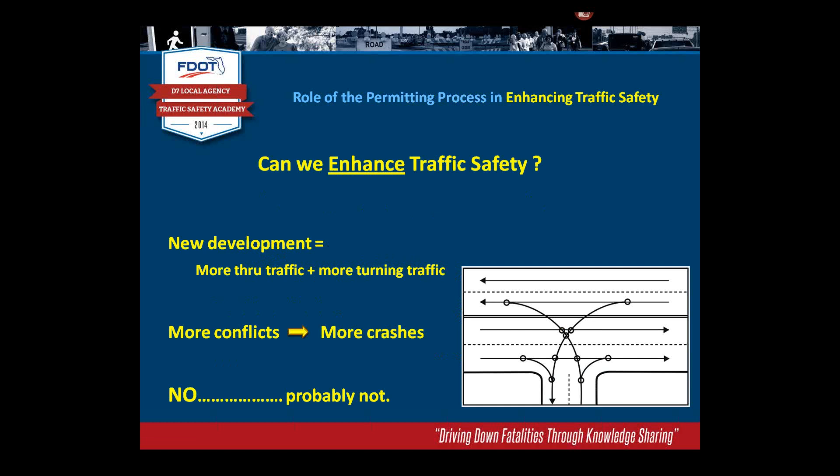That'll mean there'll be more through traffic and more turning traffic getting in and out of the development. And as we probably know, the more traffic we have, the more conflicts we're going to have. The more conflicts, some folks unfortunately are going to make mistakes, and those mistakes could likely turn into crashes. So it's going to be difficult to improve traffic safety during the permitting process, so we probably can't do that. But certainly we should be able to mitigate the impacts of new developments on traffic safety.

And the way we do that is addressing the access management features that go into a development's access. The driveways, for instance, determining the right number of driveways, the proper location of the driveways, the proper design of the driveways, turn lanes, whether or not turn lanes are warranted. If so, how long do those turn lanes need to be?

We need to address median openings. It might be that we need to adjust a median opening, change it from a full median opening to a directional, or possibly close a median opening. We may need to close a median opening so that we can lengthen that left turn lane. Maybe it's just adjusting a median opening or relocating it a little further away or towards the development.

In Florida, whenever we affect median openings, we certainly want to make sure that the businesses and property owners are aware of the median opening change. So we contact the property owners, and actually in our district we put up a little sign at the median opening so that folks know there's going to be a change there, and they have the opportunity to call and talk to us about that change.

And then if the development's large enough, it generates enough traffic, maybe there's the possibility that a traffic signal is the proper design feature that needs to be added to the roadway.

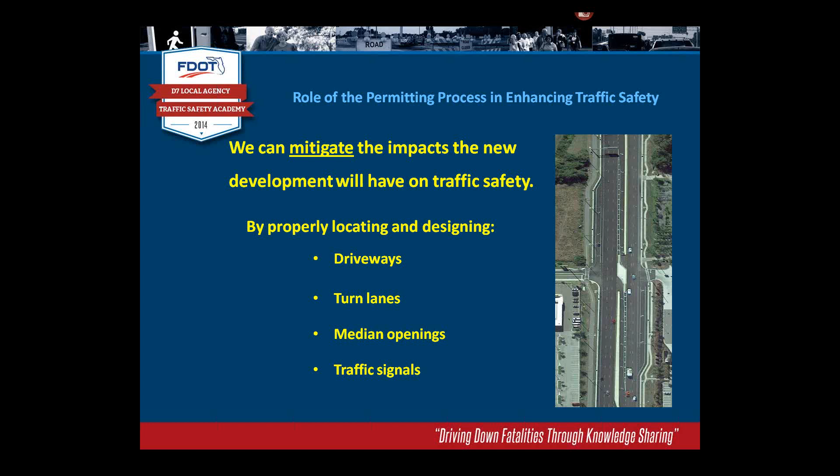So how do we go about mitigating the impacts? Well, we have to have a plan, and the plan we use typically is the traffic impact study. So one of the major topics today that we'll talk about is traffic impact studies. And then after the traffic impact studies, I just wanted to go over

How you can find some of the DOT references that we're going to be talking about today. That won't take too long, but I will go through these references so you can find them easily.

And then the last little section, I call it Stung by the Standards. I'm not sure if that's the proper title or not, but it's really just some observations I've made over the years and some thoughts I have about some of the access management features, and I'll spend a little bit of time talking about those. This last little topic is really for your consideration, thoughts that I have.

So the first topic is the traffic impact study, and if you work for the DOT, as far as I know, we only have two documents that really speak to traffic impact studies.

The first, I've already mentioned a little bit, is Rule Chapter 14-96. If you're not familiar with the Florida Administrative Code, it has a number of divisions within the code, and division number 14 are the DOT, the Department of Transportation numbers. So anytime you see an FAC 14, that's going to be a DOT rule chapter.

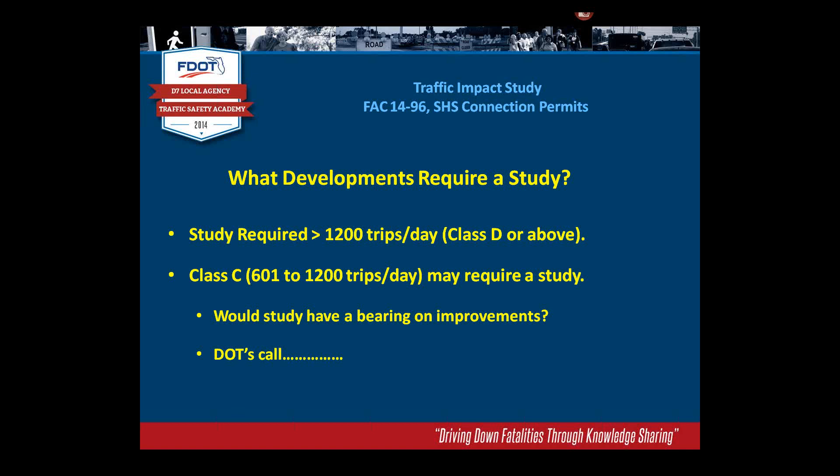The rule chapter also mentions the Class C permits, which are permits where the daily trips are between 601 and 1,200 trips a day. And you can require studies for the Class C permits, but we usually don't. We really haven't found them to be beneficial at all. But it is the DOT's call if you think there's some benefit that you can gain from those particular studies. And the rule chapter also talks about signing and sealing the studies.

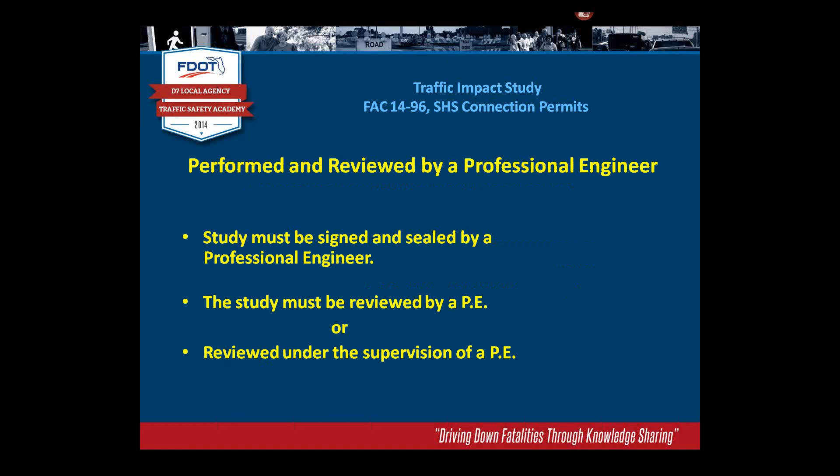The studies have to be signed and sealed by a professional engineer. After all, they are a traffic engineering study. And since they're signed and sealed by an engineer, the rule chapter also states that they're supposed to be reviewed by a PE. If they're not reviewed by a PE, then the study should be reviewed by someone under the supervision of a PE. Pretty much common knowledge, but that is specifically mentioned in Rule Chapter 14-96.

There's a little bit of information on trip generation. When the applicant submits the driveway application or connection permit application, he has to show the estimated number of trips on that application. And he has to show us which land use code from the trip generation manual he used. So that's good information to know. And again, the information on trip generation does mention the ITE Trip Generation Manual. I'll talk about that a little bit later on.

It also tells the applicant that when they're estimating the traffic, they should estimate the peak hour trips too. Usually the peak hours are going to be the morning peak hour and the afternoon peak hour. They should provide those estimates not only for the peak roadway times, usually the morning and the afternoon, but also the peak times of the development. Sometimes they're the same, sometimes they're not. So it's good to identify up front what information, in this case, the DOT will require from the developer, and we'll mention that a little bit later on too.

And then really the last bit of information that's required from the traffic impact study, according to Rule Chapter 14-96, is the applicant is required to determine the peak hour turning movements for all the critical locations or intersections. So that would be the driveways, the median openings and the adjacent streets.

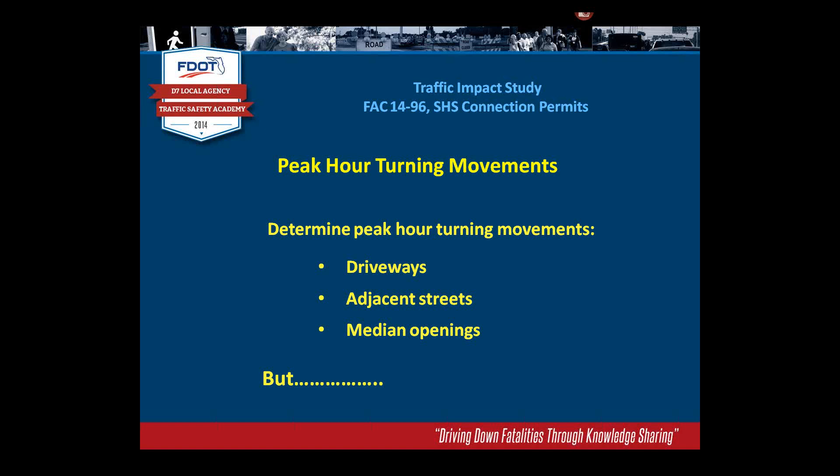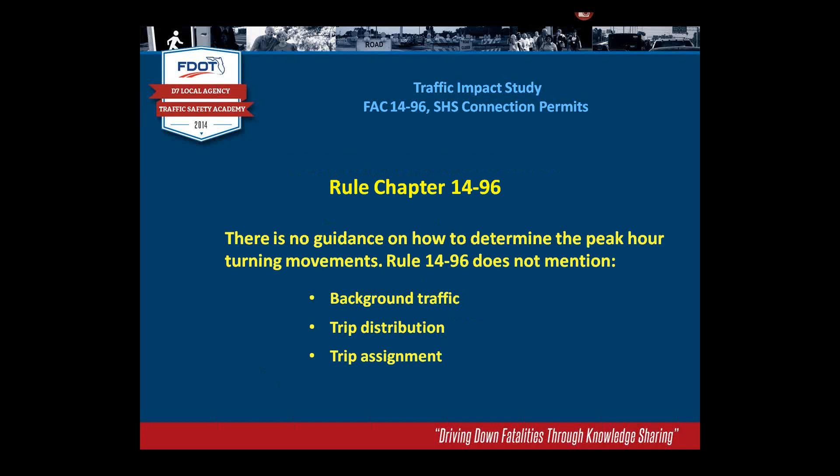But this information really isn't very detailed, and it never tells you how to even collect this peak hour turning movement information. There's really no mention of the background traffic or the existing traffic at these locations. No mention of the trip distribution or trip assignments. So in that regard, it's certainly lacking information, and it would be very difficult to complete a traffic impact study with the guidance that's in Rule Chapter 14-96.

As far as analysis and mitigation, I'll just read this, but the only time it's mentioned is it states that the study must include a traffic operations analysis of sufficient depth to analyze the impacts of the development on the surrounding transportation system. Well, that sounds good, but what does that mean, and how do you go about analyzing that information? So we really need more guidance.

Fortunately, we do get a lot more guidance, at least on the determination of the traffic volumes, in the planning document, the Transportation Site Impact Handbook. This handbook covers a lot more than just the permitting that we're talking about today, but it does have a good chapter on traffic impact studies, with a lot of detail on the data collection and estimating for the traffic volumes. But when it gets to the analysis and the mitigation, it really doesn't offer a whole lot. But I would like to go through the steps that are in the Site Impact Handbook.

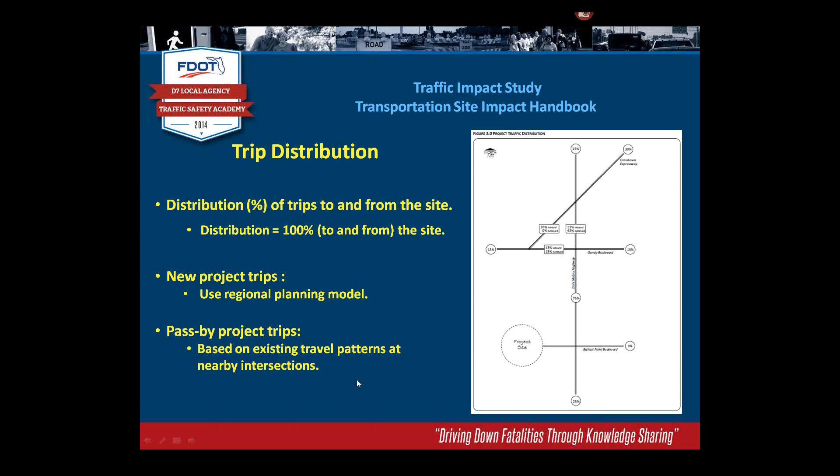So when you get through with the trip distribution, you should have something similar to the drawing you see on the right-hand side that shows the percentage of the trips and where the trips are coming from and where they're going to. Now, after you have the trip distribution and you have an estimate of the number of trips generated by the site, use that information to come up with your trip assignment. And this is the project traffic.

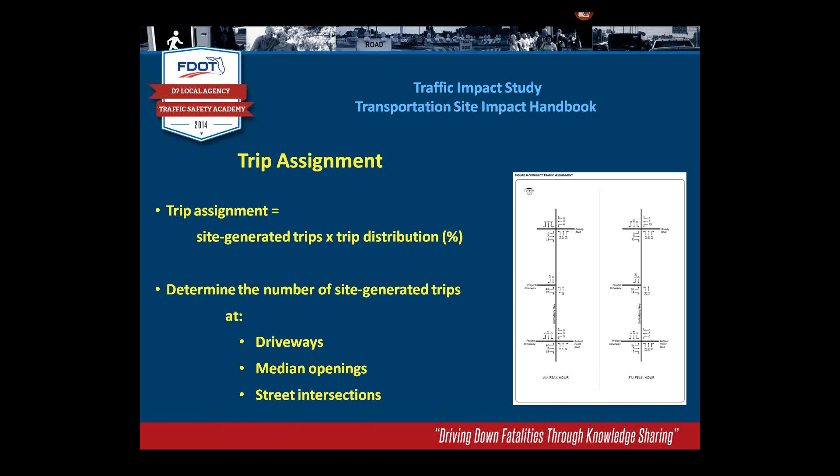So you determine what the project traffic is going to be for each of the turning movements at each of the critical locations. So you determine the turning movements then for the driveways or individual driveway, the median openings that might be affected, and also the intersecting streets. And once this step is completed, then you should have a drawing that pretty much shows all the turning movement counts and the impact that the traffic only generated from the site will have on these intersections.

Now, in addition to the estimated traffic, certainly you need the background traffic or the existing traffic. So you need to make turning movement counts at each of these critical locations. Again, it's the same three really: the driveways, if there's already existing driveways; if not, the intersecting streets and the median openings. And you need to make these manual turning movement counts, of course, during the peak hours. That's the time frames that we've decided we're going to study.

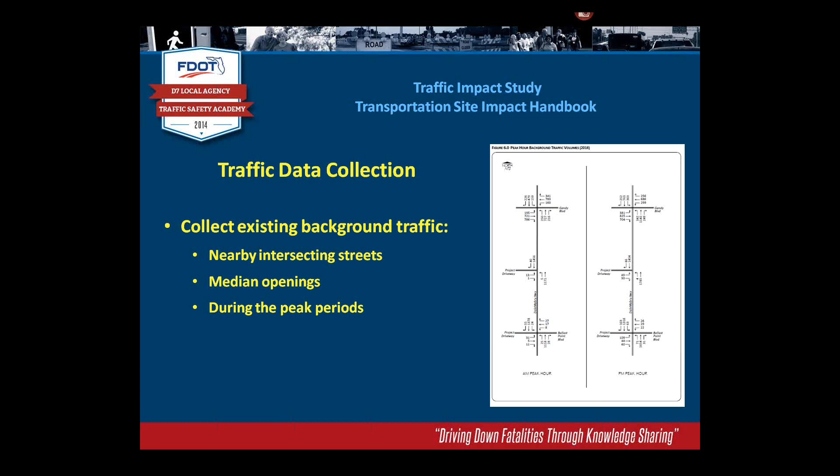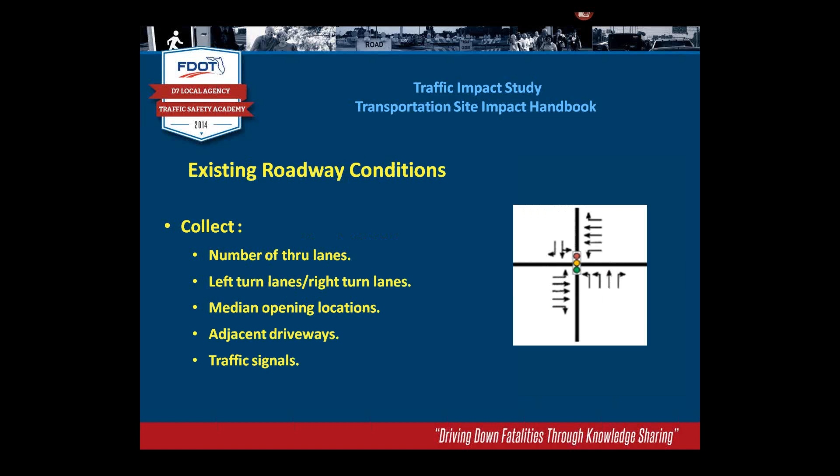Other information you'll need in order to be able to complete your analysis, you need to collect the existing roadway conditions. So you need to know the number of lanes along the roadway, if there's left turn lanes, right turn lanes, how long the right turn lanes might be, how long the left turn lanes might be, where the median openings are located, the distance from adjacent driveways to the proposed driveway or driveways, and the location of the adjacent signals in the area.

And that's really the last step in the Site Impact Handbook that frankly is of any real value. There's two other steps. One of them is called the Access Management, Site Access, and Internal Circulation step. Basically, it tells you that you need to assess the safety and operational impacts of the development, but again, doesn't really tell you how to do that. Just tells you it needs to be done. And then the last step in the Site Impact Handbook is the step on mitigation. And there again, it pretty much tells you that if you got a problem, you need to mitigate that problem. But it really doesn't tell you how to do that.

So reviewing the Transportation Site Impact Handbook, again, and I won't repeat this more than one more time, very little guidance on analysis and mitigation. And in fact, it missed another step, or at least I never could find this step. It's an obvious step, but I never really could find the step where you would want to combine your background traffic with your site traffic so you'd have your total future traffic at each of the critical intersections. That's pretty much understood, but I really couldn't find it anywhere in any of the steps in the Site Impact Handbook, so you just maybe need to be aware of that.

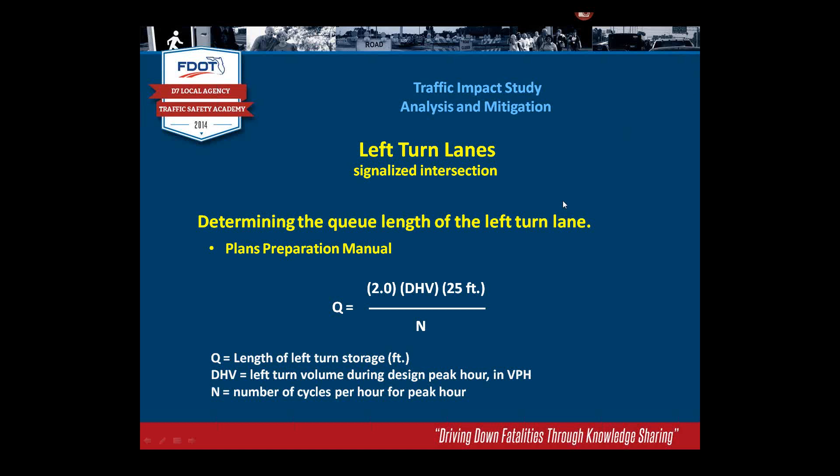and you say then that the queue length for storage needs to be the number of feet of a typical vehicle, 25 feet, times the number of vehicles. In this case, we won't do the math right here. I was going to do it actually on the next slide. But you multiply the number of vehicles times 2, and then multiply that by the 25 feet to get your queue length. I should have just gone straight to this example.

Here in this example, it's called the DHV, the design hour volume, but we're talking about left turn vehicles. So in this case, we're going to assume there's 100 left turn vehicles during the peak hour, and assume that the cycle length is 180 seconds per cycle. If you divide the 3,600 seconds in an hour by the 180, then you'll come up with 20 cycles. So 20 cycles is your N value.

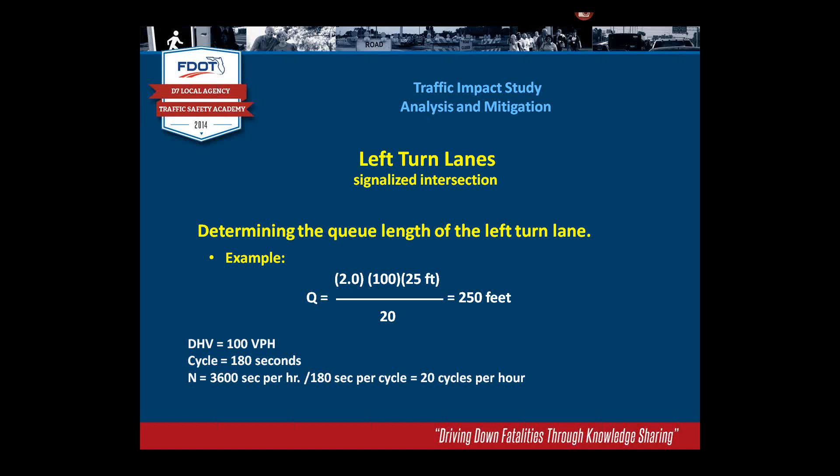You divide the 100 by the 20, so that means there would be 5 vehicles arriving every cycle. And then to be on the safe side again, go ahead and double that. So that's 10 vehicles. 10 vehicles times the 25 feet per vehicle is 250 feet. So in this example, the queue length would be estimated at 250 feet. And that's for a signalized intersection.

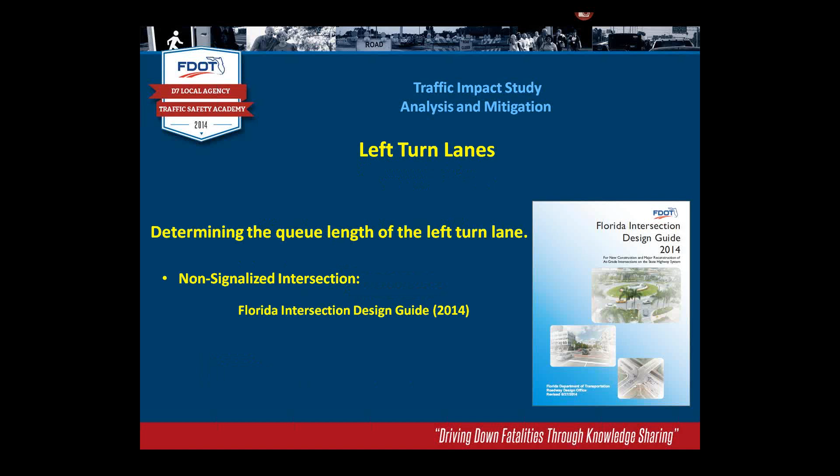Now for a non-signalized intersection, the Florida Intersection Design Guide has a formula, again, that's easy to use. And from what I know, most people seem to use this formula. And this formula is based really on the number of left turn vehicles that arrive in the left turn lane within a 2-minute period. So the formula then is the design hourly volume divided by 30, which is the number of 2-minute periods there are in an hour. That gives you the number of left turn vehicles per 2 minutes; multiply that by the 25 feet per vehicle, and that gives you your queue storage.

Again, an example of that might be that, let's say we've got 90 vehicles that are making a left turn at a median opening. That would mean in a 2-minute period, 90 divided by 30 is 3. There'd be 3 vehicles making that turn. So you multiply the 3 vehicles by the 25 feet, and so you use a queue length of 75 feet.

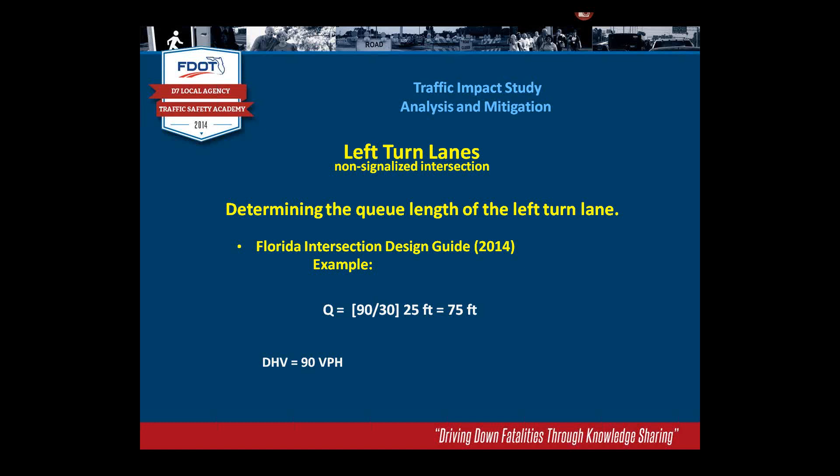Now, I didn't go into the decel and the taper on the left turn storage lengths. Obviously, we'd go back to Standard Index 301 and go through the same process we did for the right turn lanes to come up with the total left turn lane length. So that pretty well covers our analysis of right turn and left turn lanes.

Just like to make a few comments about median openings. There's no real warrants for median openings. Certainly we have our design spacing standards, and we want to try to follow those standards wherever we can. But ultimately, our decision really needs to be based not necessarily on the numbers, but on sound engineering judgment, experience, whether or not motorists will be safer, and whether or not it'll be more operationally efficient to have a median opening or not, or to relocate the median opening or not.

For me, if there's no full median opening and somebody's asking for a full median opening, I try to stay away from new full median openings. If there happens to be a situation where we know we're going to have to signalize the new median opening, certainly you're going to need to put in a full median opening, but I generally want to stay away from full median openings that don't exist today. And the option a lot of times to me is the directional median opening. We'll talk about that a little bit later. In fact, I think it's about the last thing I talk about today.

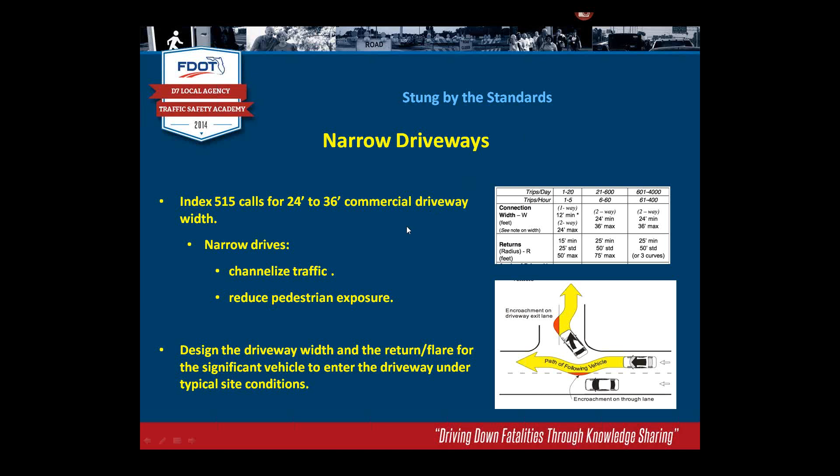And there are good advantages with keeping the drives relatively narrow. You're able to channelize the traffic a lot better. You're able to reduce the exposure pedestrians might have while they're crossing the sidewalk. That's all good. But sometimes we run across some conditions that really just aren't typical. And frankly, I had to frame this particular example. I couldn't find any of these conditions. We've had the conditions discussed during design, but I don't know if we've really constructed any. But I just wanted to make you aware of this.

The typical site conditions you see in a lot of our manuals and presentations are usually perfect - a perfect square or rectangle, plenty large enough for all the features that need to be within the property. That's the way it is most of the time, but there's plenty of times folks try to fit businesses on properties that are too small or an odd-shaped piece of property. That creates circulation issues and also issues with throat depth - you might not even have a throat depth because of how the property is designed.

For instance, in this particular example - and this is something that's come up on some design projects - you've got fueling stations very close to the right-of-way, and the aisle between the fueling station and the right-of-way is very narrow. For a vehicle to come out and pull up far enough, they're probably going to be out of the way if you have a 24-foot drive.

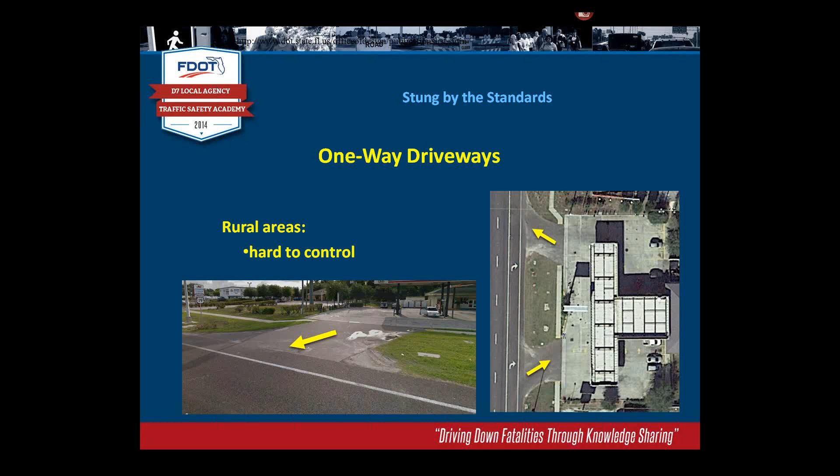In rural areas, we can also have a lot of problems if we try to install a one-way driveway in the wrong location. In this example, this is supposed to be a one-way driveway. It looks like a narrow two-lane driveway, but there's just very little distance between the edge of pavement and the edge of the right-of-way, so you cannot geometrically design a driveway that looks like it's one-way - it's going to always look like a two-way driveway.

And obviously this driveway doesn't have any of the signs or pavement markings that should go along with a one-way driveway. The driveway next to it, to the left, is also supposed to be a one-way driveway, a one-way out. Obviously that would be impossible for people to really recognize.

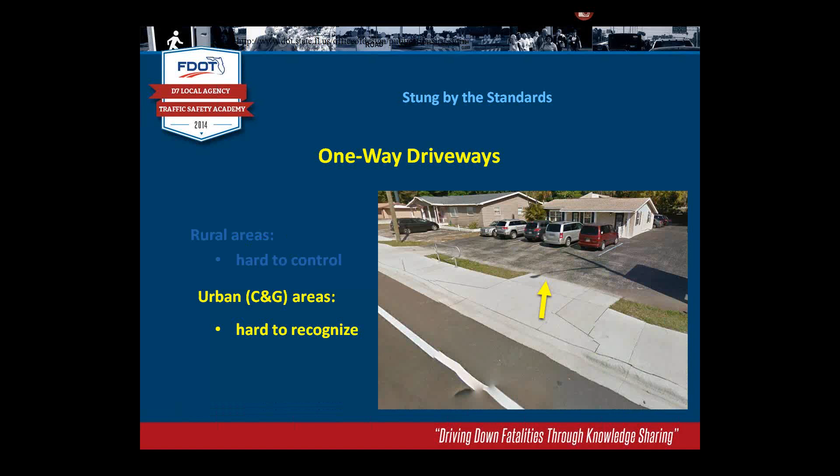So anyway, wanted to make you aware of these conditions we've seen at one-way driveways.

The concrete pork chop island, don't need to say a whole lot about it. They're supposed to discourage left turns into driveways and left turns out of driveways. If you don't have a restricted median and don't put in the concrete island, you can put in a painted island instead, but you'll probably get even less people paying attention to what you want them to do, to stay away from the left turns in and left turns out. But personally, I just don't like the concrete islands.

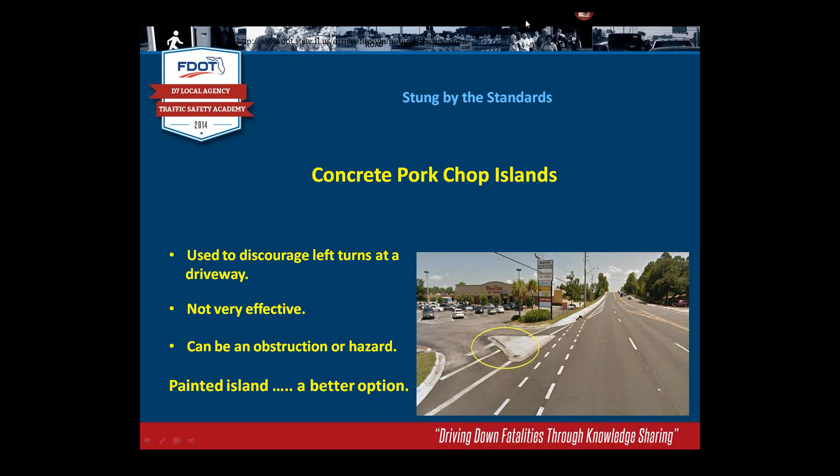I've seen plenty of concrete channelization islands like this where we have raised medians where there's really no opportunity for somebody to make the left turn in or left turn out. I guess what we're trying to do is make sure folks are aware that if they got to the median there wouldn't be a median opening there, but I really just can't see that being a problem.

The next features I wanted to talk about were the continuous right turn lane and the separate right turn lane. If I had my preference, I'd always use strictly just the separate right turn lanes. But we have conditions out there where, in my opinion, the continuous right turn lane is a better option than the separate right turn lanes.

Regarding continuous right turn lanes, I know some references discourage their use. The only thing I remember reading is that you may encounter situations where a motorist gets into the right turn lane with their turn signal on, and a motorist coming out of the next driveway thinks they're turning into their driveway, so they pull out and get hit with a right angle crash. The vehicle with their signal on was actually intending to go up to the third driveway or a driveway further away. I guess that's always possible and maybe it happens, but I'm just not aware of it happening a lot.

But I am aware of some conditions we've had with separate right turn lanes that really made life difficult. In fact, there's been several locations in northeast Florida where we've had enough problems that we had to eliminate them.

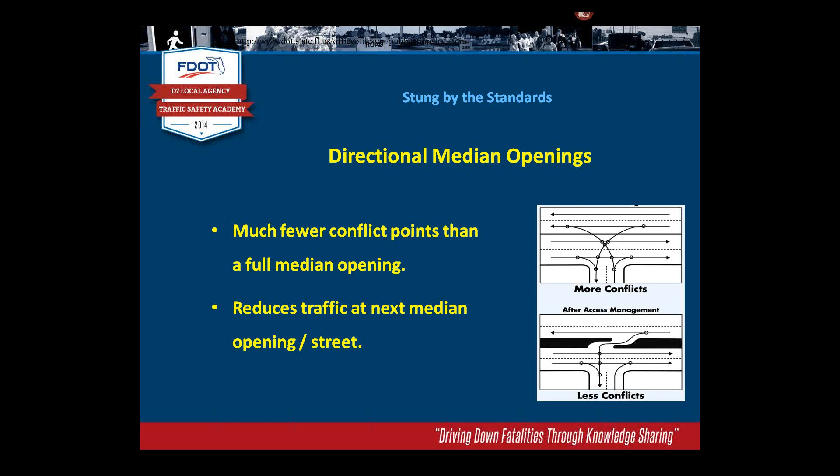Now, every time we add another median opening, that's another location with conflict points. So our spacing standards are based on making sure the through motorist can deal with the first conflict point, maybe a median opening, get past it, and still have enough time to recognize the next conflict point, observe any issues there, and react in time to avoid a crash at the second median opening. I understand why we need to space median openings out based on road classification, primarily due to the speed limit. But I still think there's a lot of opportunity where directional median openings have a lot of value.

Now, we haven't really mentioned this procedure. There's just one procedure on median openings that the DOT has, and I'm pretty sure it's in the planning side of business. That's the procedure that discusses when you should consider installing a median opening, and when you shouldn't. It's also the procedure that mentions the Access Management Review Committee and sets the ground rules for the AMRC meetings.

What the procedure says today is that deviations for directional median openings do not need to be reviewed by the Access Management Review Committee. So I hope I'm interpreting this right, based on the old procedure. If you have a location, and after you've studied it you determine the directional median opening is the proper feature there as opposed to another type of feature or no feature, then you don't have to meet the 10% rule requirement for deviating on full median openings. If you deviate by more than 10%, that's okay as long as you've done the proper study to prove it's a good design.